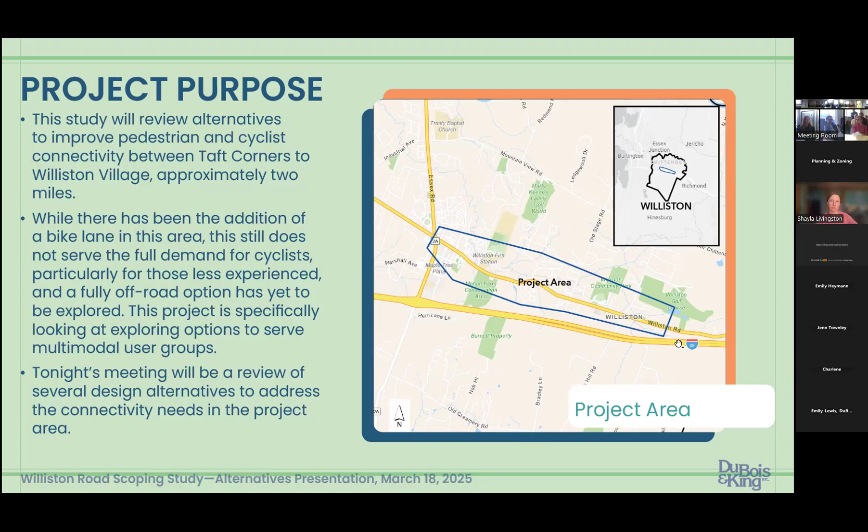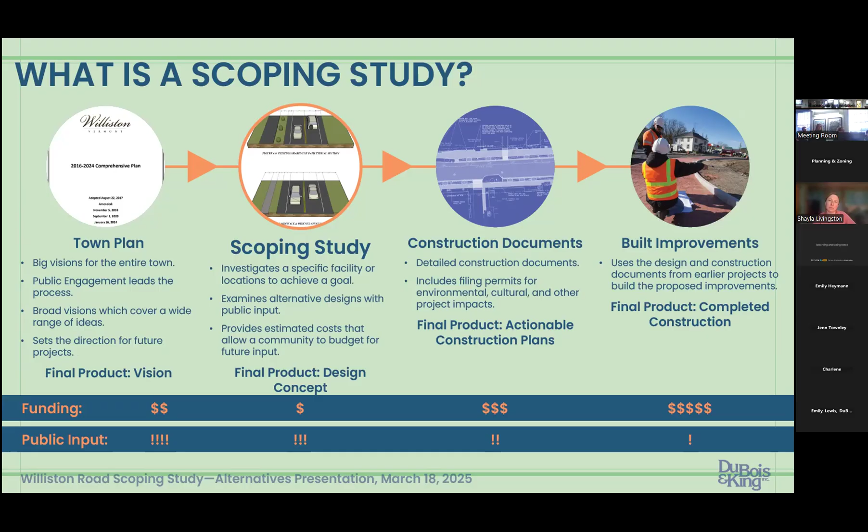So we kicked this project off back in October, doing a review of that corridor. We did the public survey and that initial public meeting in December as well. Since then, over the winter, we've been working on these different alternatives. Tonight we're having that alternatives presentation. As I mentioned, we will then refine to a preferred alternative and present that final recommendation to the select board in the form of a report that would be available to the public. Then, like I said, it would be up to the select board and the town to determine how they would like to move forward with any recommendations.

All right, Kate, can you talk about the project area a little bit more? Sure.

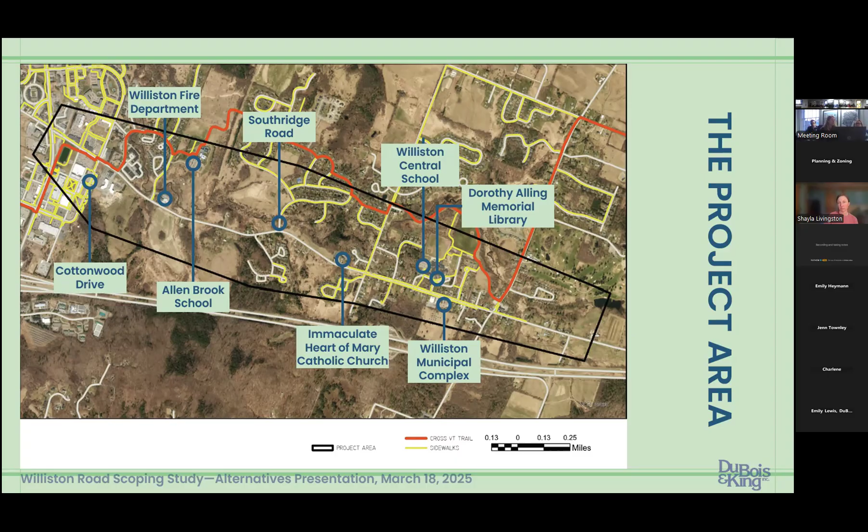So to address that - Emily's going to keep going. Okay, all right. So we're going to start in the westernmost edge of the project area, where you can see we have this pretty wide multi-use path right here that's along the south side of Route 2. It does terminate pretty quickly.

So essentially, this is where we're looking at this project to pick up at the western edge of our project area, which is the eastern terminus of the existing path system. So picking up here and then moving east to get into the village.

It might be helpful to point out that although the satellite view is old, that's Cottonwood on the bottom, and the Taft Farm Shopping Center on the top. The dominating retention pond to the right is for Cottonwood Crossing, which now has a bank and a lot of other things. So that's where our project area would start on its western edge.

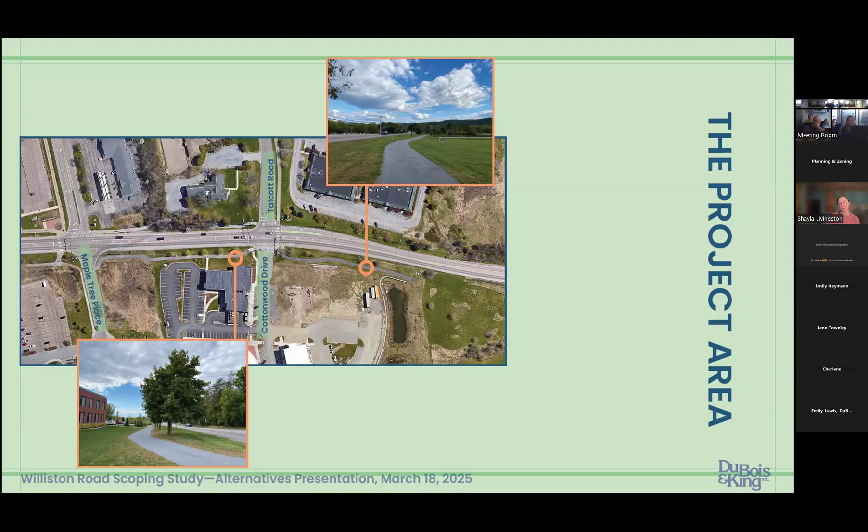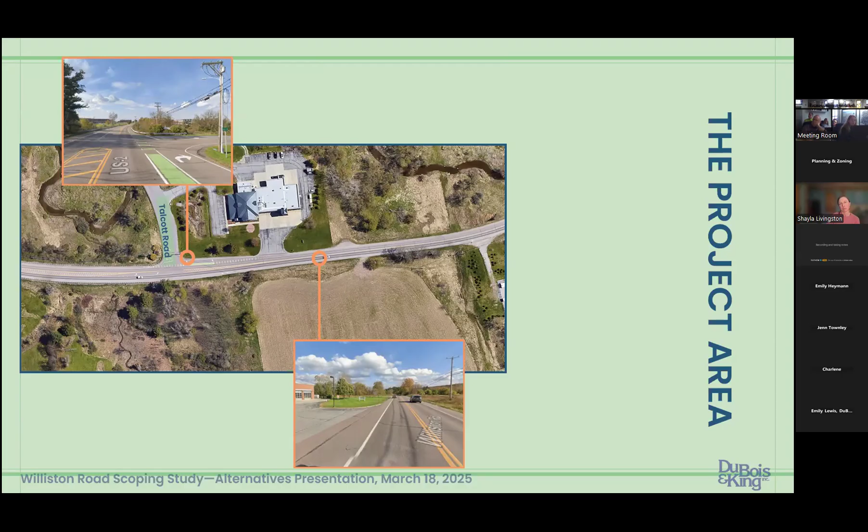As we continue to move east along Route 2, we'll see the fire station right here, and we'll also see part of the extent of that bike lane that was put in a couple of years ago. But this is where the road starts to get a little further away from the stores, cars start to move a little faster, and the road starts to get a little more precarious. We've got these nice wide shoulders and good lines of sight, and that continues undisturbed for a long stretch.

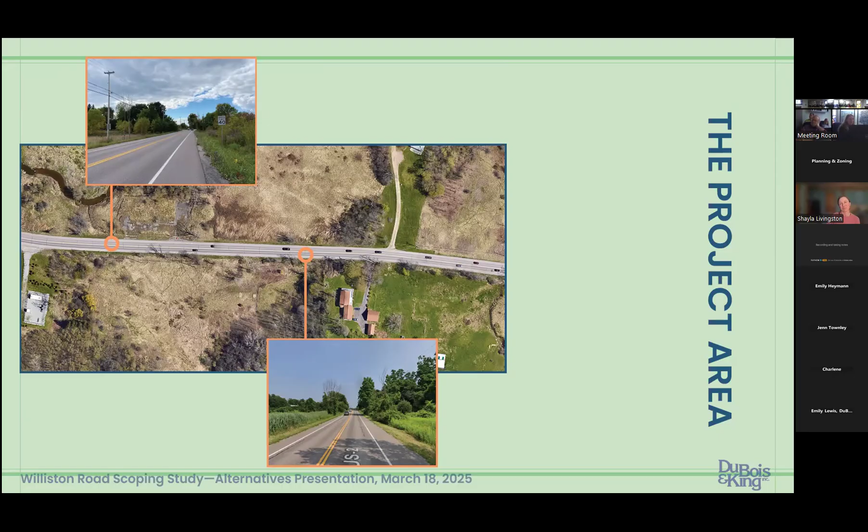On both the north and south side of the road there are some undeveloped areas. There are some wetlands in that area, potentially more than are mapped. The shoulders start to get narrower, and things along here do have poison parsnip leaning in during the summer and gravel on them in the spring. There's obstacles, and we also have a handful of residences as well.

Moving further to the east, we start to get more residences, including the ones off of Timothy Way and Southridge Road.

We heard in the survey and in the first public meeting a lot of concern about access and crossings at these two intersections, both from drivers and from pedestrians as well. It can be kind of scary and dangerous, even in a car, to try to do that, let alone on foot or on bike.

This area is also worth mentioning, you're at the point where that large hill by the church ends and starts to even out. So cars traveling west have potentially picked up speed because they've gone downhill. And then, of course, you have these two neighborhoods that let out right in this area where folks might be trying to cross the road.

As we continue to move up, although from the orthophoto and our bird's eye image it looks a little flat here, it's actually quite a steep section of road where we have a few private residences to the south, and then a property owned by the church to the north.

Is there anyone from the church here tonight? Is there anyone from the association on the south? Yes, excellent, thank you for coming.

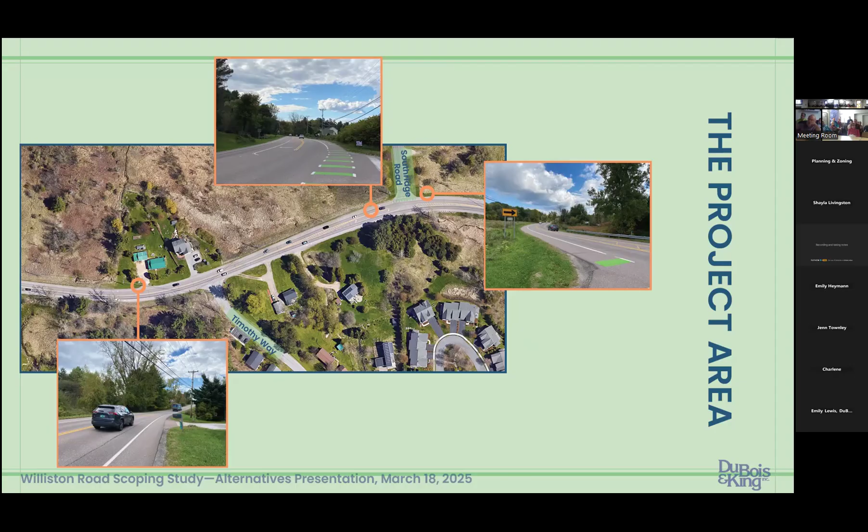As we move a little further east in the project area, we pass by the church and see more residences, but also the beginning of existing sidewalks in this project area.

Generally speaking, in this area sidewalks exist on both the north and south sides of the road, which is really effective for folks trying to move around, connecting people to facilities such as the library, the school, or the town offices we're in.

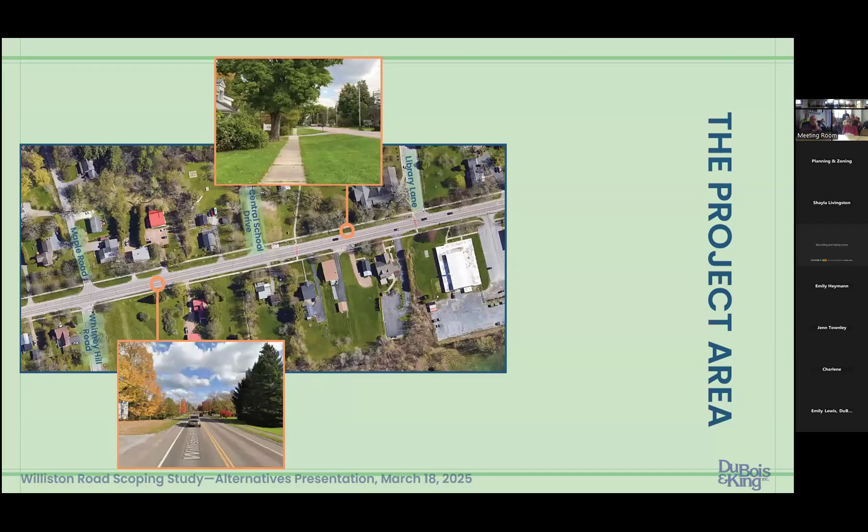That's point one of our comments to make tonight. That's a difficult place for pedestrians at this point.

That's a spot where when somebody is making a left onto Old Stage Road, people cut off to the right, so that's an area where there's got to be a huge buffer for other users. Thank you for bringing that up, because that definitely was the other intersection area where we heard a lot of feedback and concern.

Can I make a comment, since we're looking at the intersection? I know we got a lot of feedback from our community—is there a possibility of putting a four-way stop at that intersection?

Those can certainly be some recommendations that we make. This study isn't extensive enough to really explore in depth some of those intersection improvements, but we definitely recommend further study at those intersections, utilizing all the feedback we've heard to justify that.

How much variance from the road do you have? How big is the right of way? I think it's generally a four-rod right of way, so about 66 feet along the majority of the road.

Do you know if it varies as you get closer into the village? Not sure. And that's the full width, right? Yeah, both sides, 33 feet from the center line—66 feet from edge of the road.

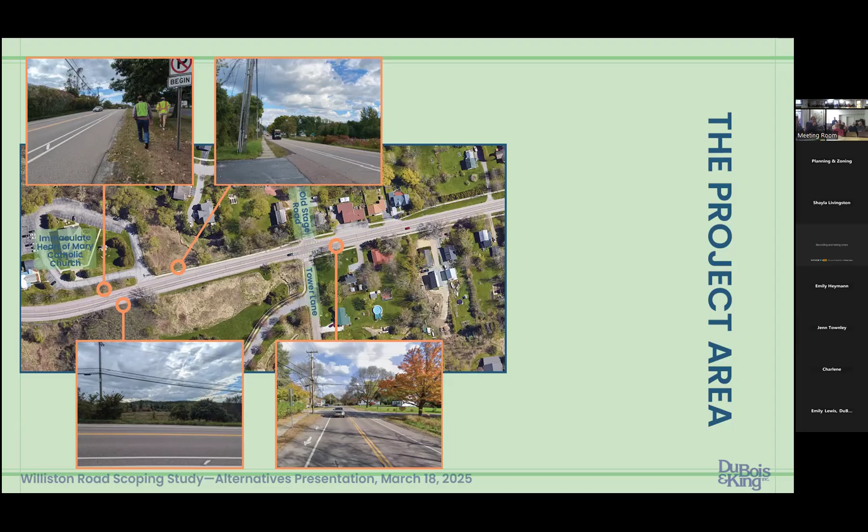Well, yes, from edge to edge, so the 33 feet. Would the intent be to push it back a certain amount of feet to stay away from the road? We'll get into that as we start moving through the alternatives, thank you.

So let's just jump right into this then. The main alternatives we're looking at are primarily along the north side of the road and along the south side of the road, with a little bit of deviation there.

So generally we're looking at whether we could stay somewhat parallel to the road. Potentially, as you're moving up the hill getting closer to the church, is that an area where you might move outside of the right of way?

If there could be an agreement with private property owners to do that, it would alleviate some of the steepness of that path, making it easier for folks to traverse it.

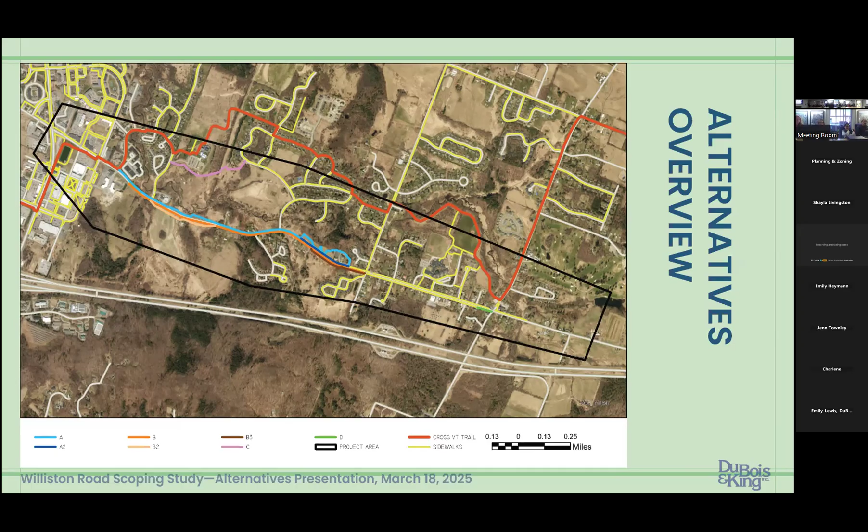So here's an example of generally what the options would look like. So, to answer your question, sir: generally you'd have your travel lane, a shoulder of 3 to 4 feet, a buffer of approximately 5 to 8 feet, and then a 10-foot shared use path.

We've heard that path would need to be a minimum of 10 feet to allow for plowing in the winter—pickup truck plowing specifically. Can you clarify that, please?

Is that 10-foot paved, or a 10-foot right of way with a total right of way of 10 feet? That would be the 10-foot paved path. So what would be the width of the right of way for something like that?

18 feet from the edge. Isn't this showing it within the right of way? Yes, this is generally showing it within the right of way. This other option is if you were to separate from the road, just showing it off to the side.

So we're going to get started a little bit closer here. So here we are at Taft Corners. Cornerstone is just over here. Here's the end of that existing path.

Looking at alternative A, the blue, it follows along the north side of the road, generally alongside the road. At a minimum, you'd have your travel lane, your 3 to 4 foot shoulder, approximately a 5-foot buffer, and then your 10-foot path, so that there's a buffer between users of the path and the cars, rather than having it directly next to it. Can I ask you a quick question about that buffer?

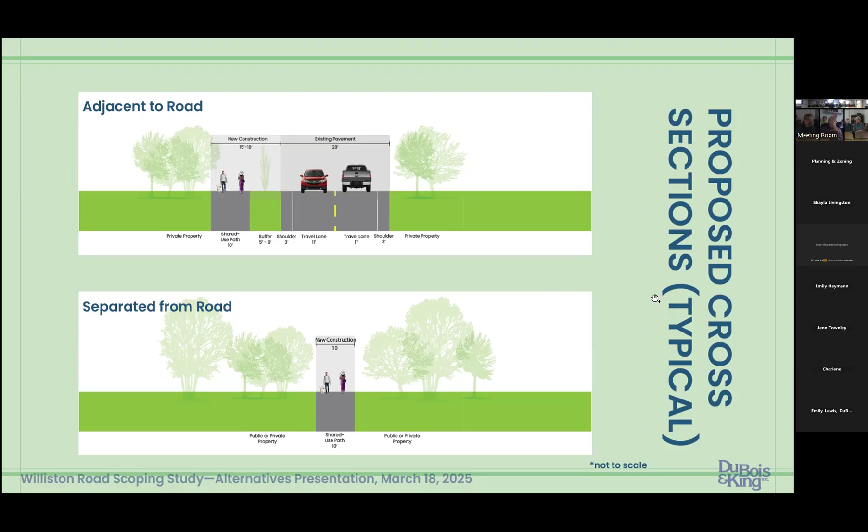Yeah, we have that problem with our sidewalks in the village. How far do they push that snow out? Well, if they're going 40 miles an hour, it's going 20 feet, I think, but then they come by with a wing if it's built up too much and they push it again. Okay, good to know, thank you. I don't know what the answer is, but it's just to keep in mind. Absolutely, yeah, thank you for that.

So where you kind of see a little bit of variation, it's not exactly parallel to the road. That's where we are looking at some of the slopes there, and trying to determine where you could build a path that, primarily within the right of way, requires the least amount of grading adjustment. We've noted here some of these areas, right here, has a really steep cross slope.

We called out some of the areas where there would be some crossings needed. So if you went with the orange, alternative B, we want to provide some kind of crossing so that folks coming down Talcott Road would be able to cross over and get onto the path, acknowledging that this is not just an end-to-end path — people are going to be wanting to get on it at various points.

Kate, do you want to talk a little bit about where this bumps out? Sure. As part of tonight's meeting, we wanted to show multiple different alternatives. So on the south side of the road, there's an orange path which we're calling B, and then as an alternative to that, a lighter orange path we're calling B2. This B2 is still staying on publicly owned land, but it's further away from the road — a little bit further from the road, adding a little bit more length, but it's one of our alternatives. We can see it starting on this slide and then it continues over here.

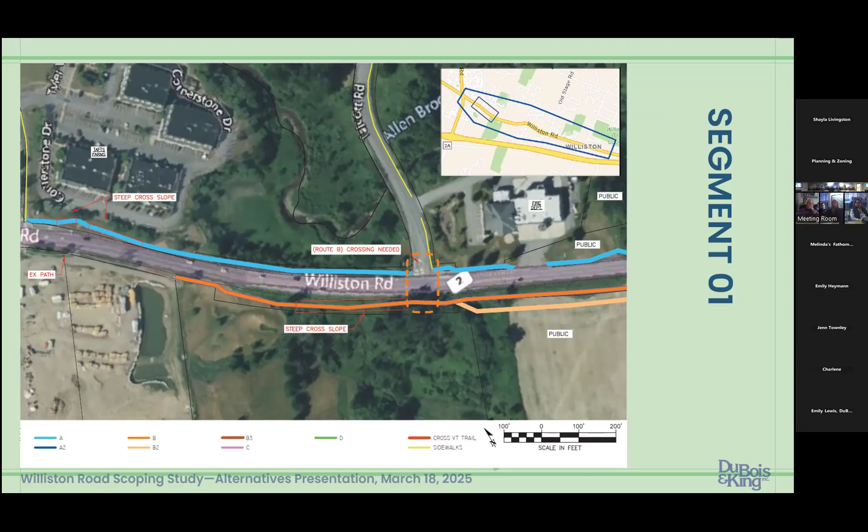Hi guys, I don't know if you can see my hand. I'm sorry, my video has mysteriously stopped working, but I'm curious if you guys have ranked them in A, B, C because those are the order you're recommending them in.

There's no reason for the letters right now, mostly just north to south. Thank you, yeah, it's just a way to name them right now. We don't have any preferential ranking that we've included in this.

Can I ask you a question? What's the disadvantage of being further away from the road? Because that seems like it's the preferred solution. Disadvantage could be additional length included there.

Incremental cost. So some other things that we would recommend be done prior to any design is a wetland survey along this entire area. So for environment, we've looked at that information at a desktop level, looking at the Vermont ANR Natural Resource Atlas, but there's only so much that you can determine from looking at that.

I see, so there could be other environmental considerations that may impact the location. And this section we're looking at here is owned by the state, and the town owns the part to the west of the Cass place.

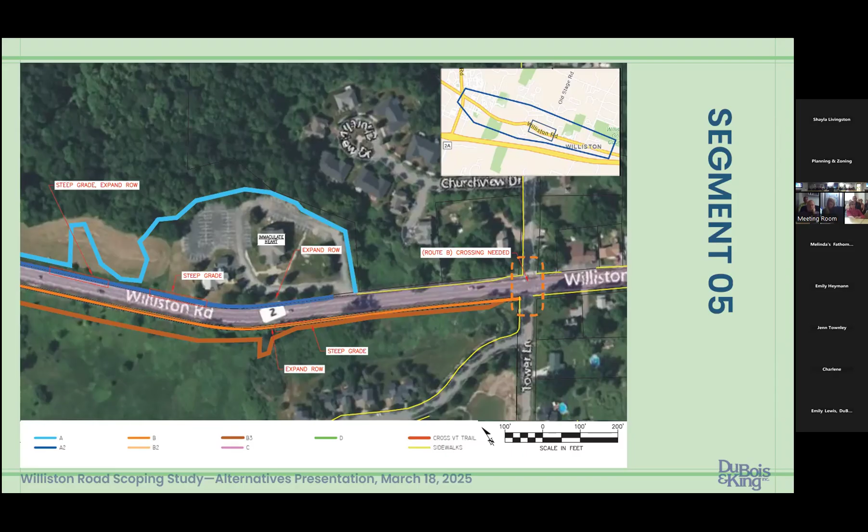And you start to have buildings closer to the road, sidewalks, and theoretically slower traffic. Can I make a brief comment on that? As a lover of going back into the woods, I love the idea of the link behind the church, but my concern is that if there's also a nice sidewalk, whatever its condition, that cuts that entire meander off, it's going to be overwhelmingly tempting for people to stay on the straight and narrow, and somebody's going to get hit, because there's not enough room jammed right up against the road on that sharp curve in the highway.

It's almost like an attractive nuisance, distracting people from the intended route, which is the longer one. So right now I would remove that piece of bike path in front of the church, if you wanted to go with the meander. Yes, I think that's absolutely right.

A and A2, the two bluish options — the dark blue is basically turning the bike path, instead of having a bike path, into a shared use path adjacent to the road, versus the other option having it come across here and then meet up with this yellow existing little sidewalk.

The zigzag on B2 is nothing, that's not going to cause any issue for anybody. But the one around the church is probably 150 to 200 yards at least, plus there'll be some elevation gain and loss. Speaking of that southernmost zigzag, I just wonder — if that option is chosen, is there no truck plowing possible, because that looks like a super tight turn?

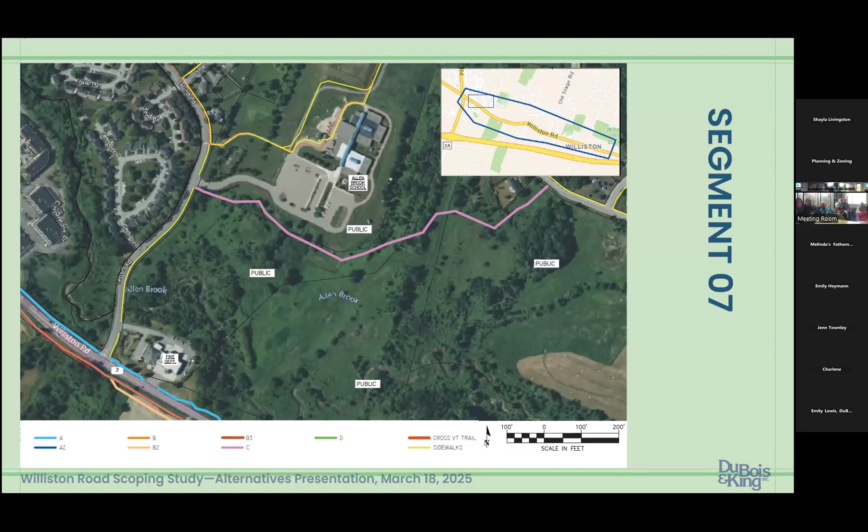How do you get from Allenbrook Road to Taft's Corners? You have to go on the street, don't you? Go on the local street. Yeah, I rarely see cars when I ride my bike if I go on a secondary or local road.

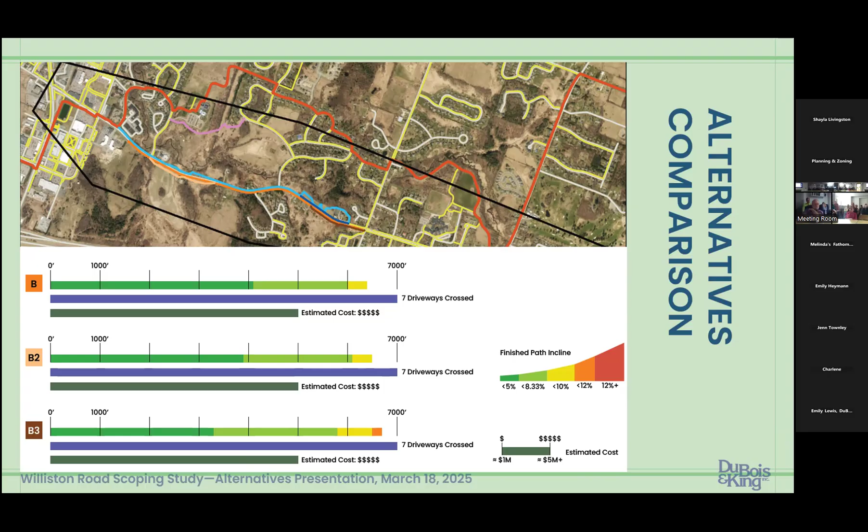So what provisions have you made if you were looking on the north side about that? I don't know how you get around it. I really don't. You'd have to go behind them or something, and that's all wet.

Yeah, that's something we need to look a little bit closer into, and that intersection is too. That's definitely one of the areas of concern and constraints that would have to be investigated more in depth, because it is showing quite the blue going in front of that, and you have very little margin right there - that is a really, really tight pinch point.

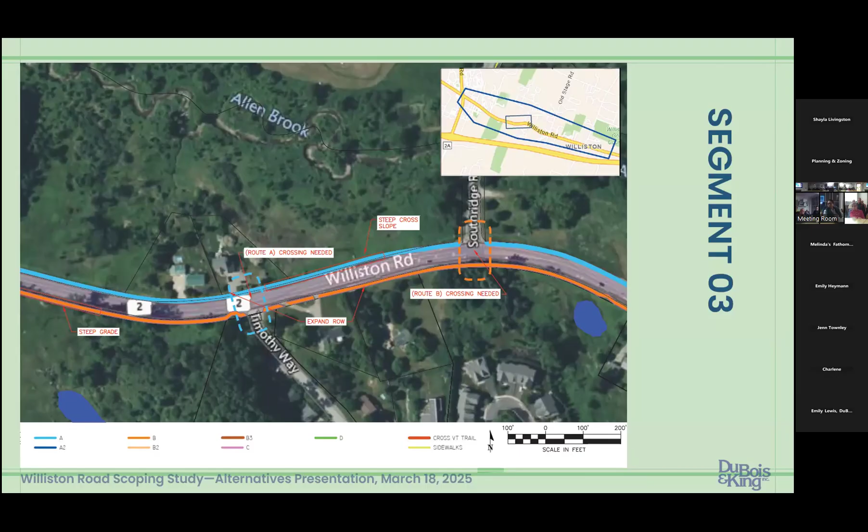It was interesting to see that there were 4 driveways on the north and 7 on the south. One of those 7 is the gas station, Vermont gas, pump station, that's one of them I assume. And there's fewer road crossings on the south side - more driveway crossings, but fewer roads, because on Talcott Road the fire station has a huge driveway.

Counting the driveways was kind of a way to note comparisons of basically how many property owners are gonna be right adjacent to there that you would need to coordinate with.

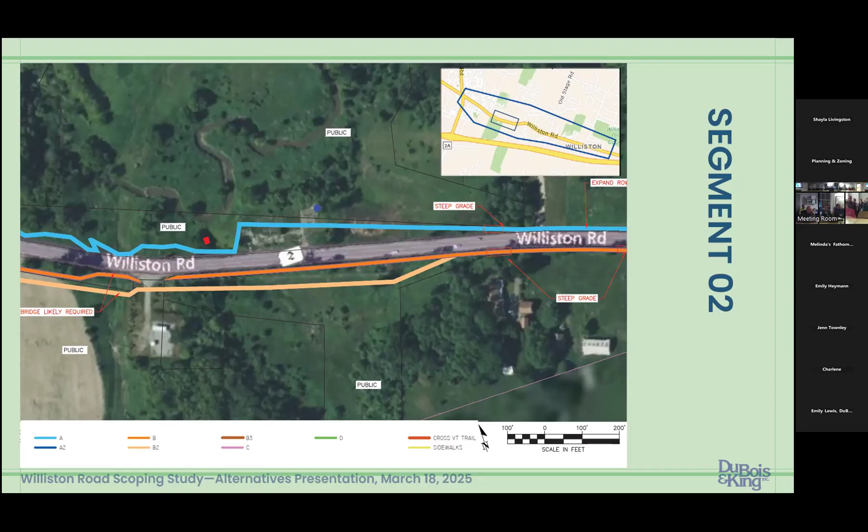So this does not include the scope of connecting the proposed new bike path to what exists. I think that one gentleman was saying it just takes a little bit, maybe a few hundred feet, to go up to North Williston Road. So that is not part of the scope right now, but I think we could certainly look into that.

Yeah, it would make sense to me. I don't know, yeah, I think that's a great suggestion.

Where that path dead ends on the west side also was in theory to go further off towards the Allenbrook School as well, and would sort of echo with a substantial piece of it already completed.

One of the things I'd hesitate - I would be cautious on quoting pricing estimates even until we know the impact of the Trump tariff war on both steel and the kind of lumber products that have to go into it. Yeah, absolutely, that's real. But we don't know what the answer is.

So the numbers we gave you right now are very rough ballpark, we'll try to narrow it down a little bit more. We always put a very large contingency on there, because construction costs skyrocketed after 2020, and even with large contingencies it was hard to keep up with what the costs actually were.

We're gonna have to figure out how to take into consideration things like tariffs. I'm sure other people at our company have been thinking about that, and we'll certainly talk with them, because that's a really good point - we don't really know how it's gonna impact this.

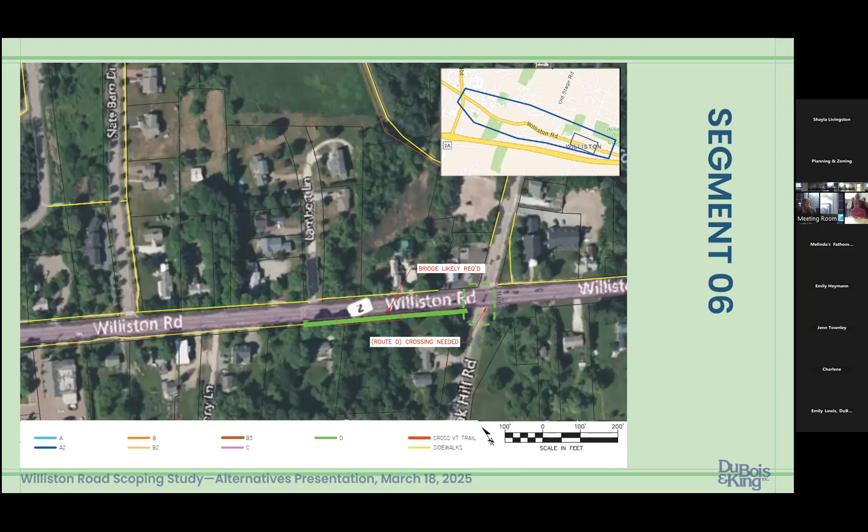If we were in a normal environment, most commonly it would be 80% grant funds, 20% local match. We're pretty much just about done anyway. These are just the estimated costs for those two other alternatives, the little link up near Allenbrook School, the little additional sidewalk there.

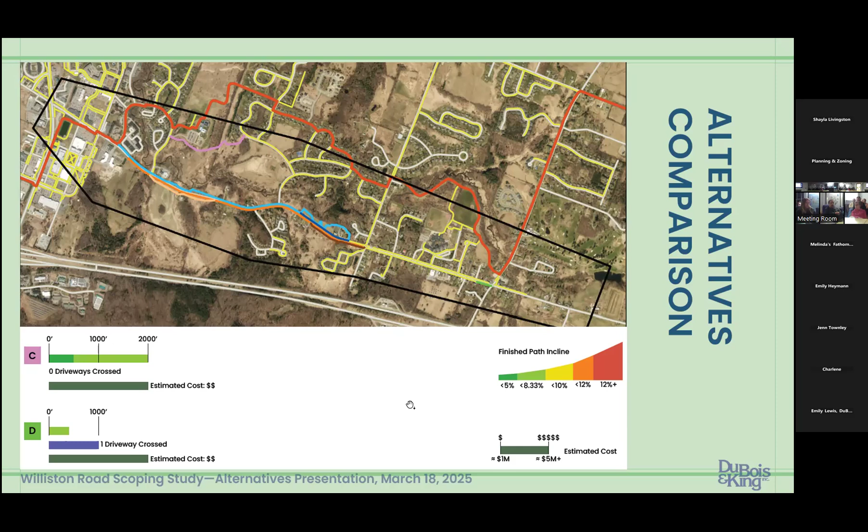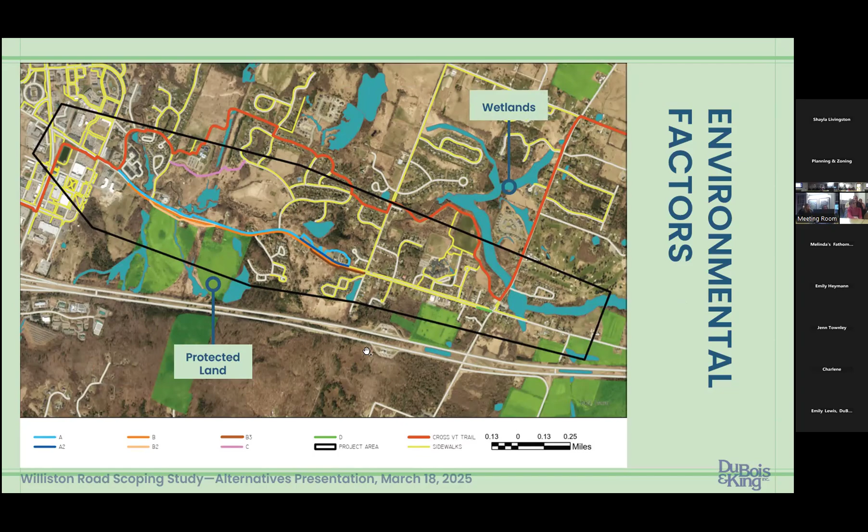Just a brief overview of some of the environmental factors we're looking at. The green is protected land, the blue is currently mapped wetlands. There certainly could still be the potential for other areas of wetlands that are not currently mapped, which is why we would recommend a further environmental study prior to moving forward with any alternative.

And that just moves us into next steps, which I actually kind of started off with. So, Melinda, I believe ultimately the select board would choose a preferred alternative, which doesn't have to be done directly from what we showed you today. We can add some modifications and then we would refine that alternative.

I have a question that's out of scope, or maybe more of a comment for future consideration, but there's interest in burying the power lines in the village. They're a problem in a lot of ways, not just aesthetically, but it's prohibitively expensive. So what I wondered is, if we're putting a multi-use path on one side of Route 2 through the village, if you were to bury all the utilities—not take the power lines down now, but put all the conduits in—would there be an efficiency in the future to being able to get the utilities underground?

Maybe, I don't know enough about that, but I realize it's not in the scope. Certainly it's worth considering anytime you can make efficiencies.